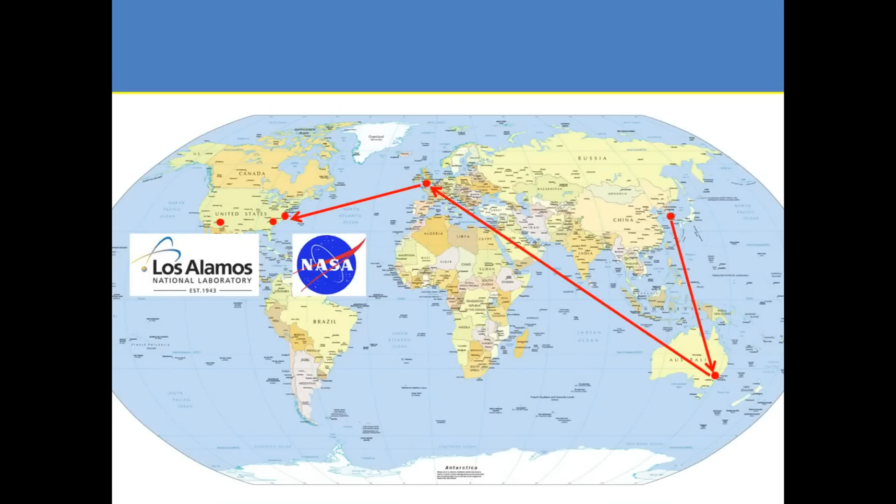I started doing some work on structural optimization. I'm here now, but I spent last year at some of these places in the States, and I'm going to talk a little bit about the things I've been doing over there.

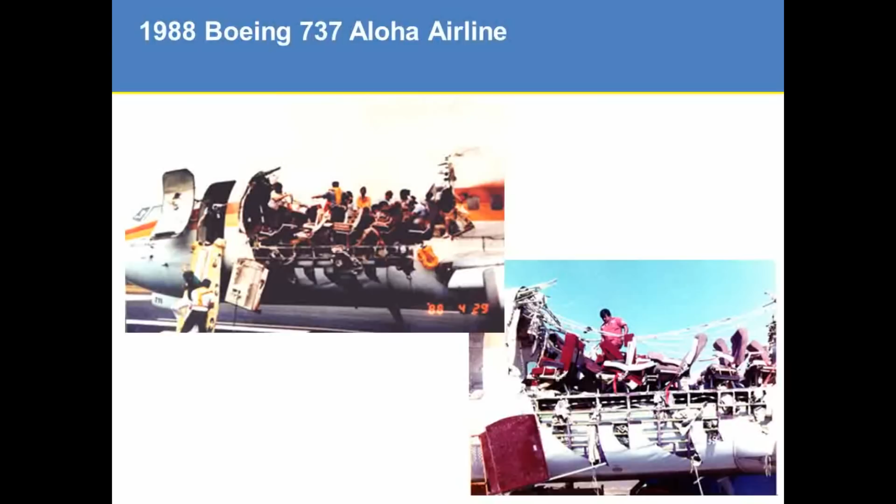So what do I actually do? Well, if I get what I do wrong, this is what happens. So this aircraft that you get on is safe, but this is the sort of thing that will happen if I don't calculate things well enough, and if I don't design things well enough - it'll actually break apart in the air, and you don't like that.

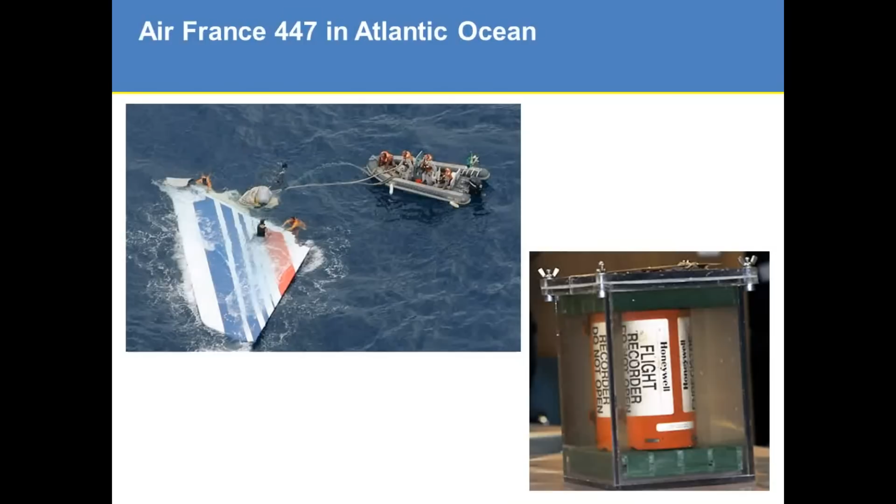So the common question then is why is black carbon fiber material used to make up all of the aircraft? Why is that? Because it's light - yes, excellent, so it's light, and we've got limited power. So aircraft engineering is all about balancing the weight against the power. If we can reduce the weight, obviously fuel economy goes up. This is now a very critical stage in this era to get this right.

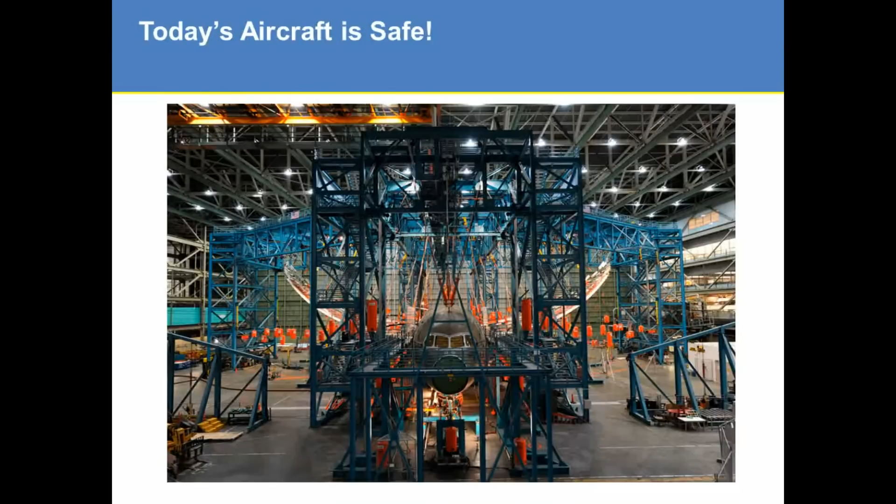Before I move on, I just want to show you the sort of testing that today's aircraft goes through - you can see the wing bend as far as that. The aircraft we fly today or tomorrow is safe.

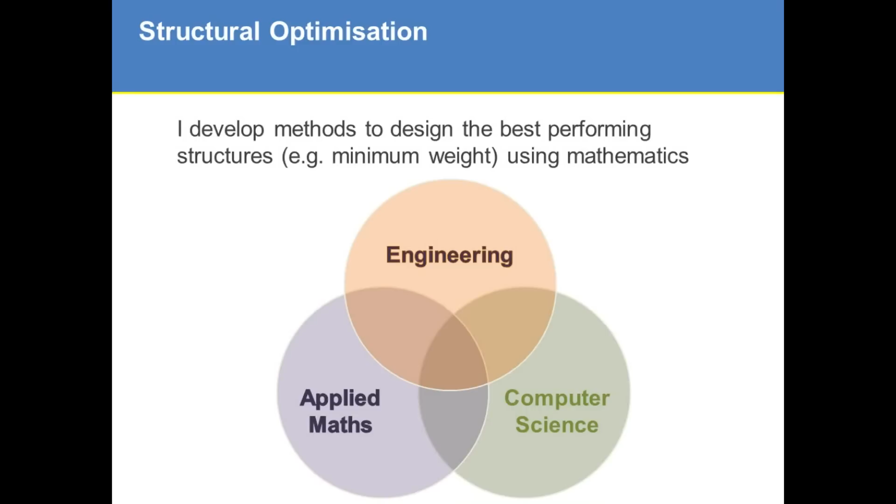So I do structural optimization - I mentioned the word earlier, so it's not so scary now. I develop methods to design the best performing structures using these three different disciplines. I work very much at the interface, and when I use that sort of method, you can see the structure that is actually being optimized.

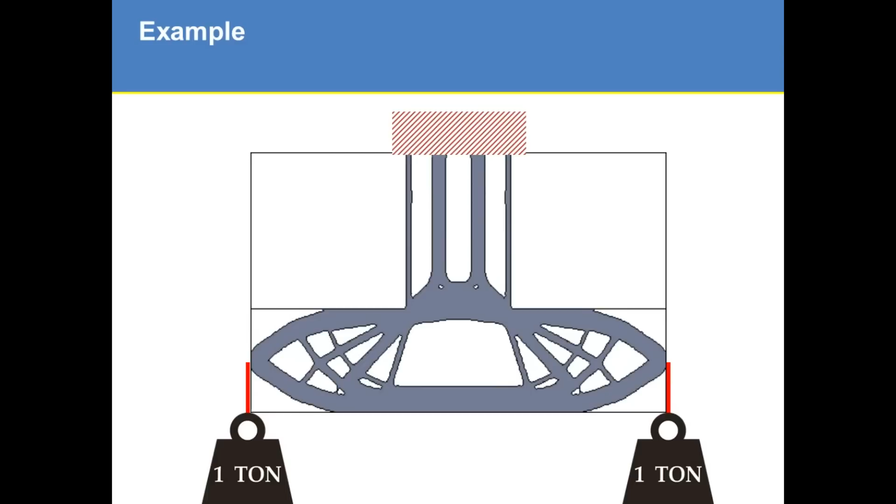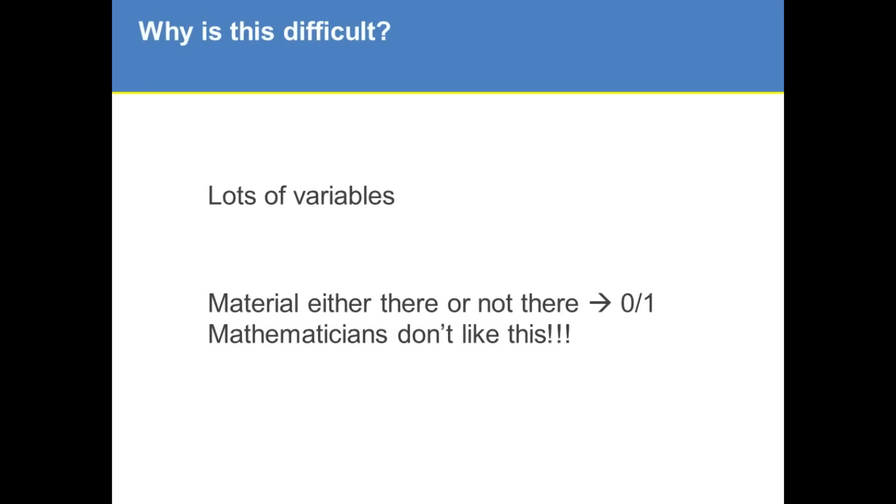My computer algorithm is actually optimizing these structures where I'm hanging the weights over here and just clamping it on the top, so you can see I'm using my mathematics to do these calculations. The reason why this is difficult is there are lots of variables, and materials are either there or not there - this is a 0-1 problem, and mathematicians don't like this sort of problem.

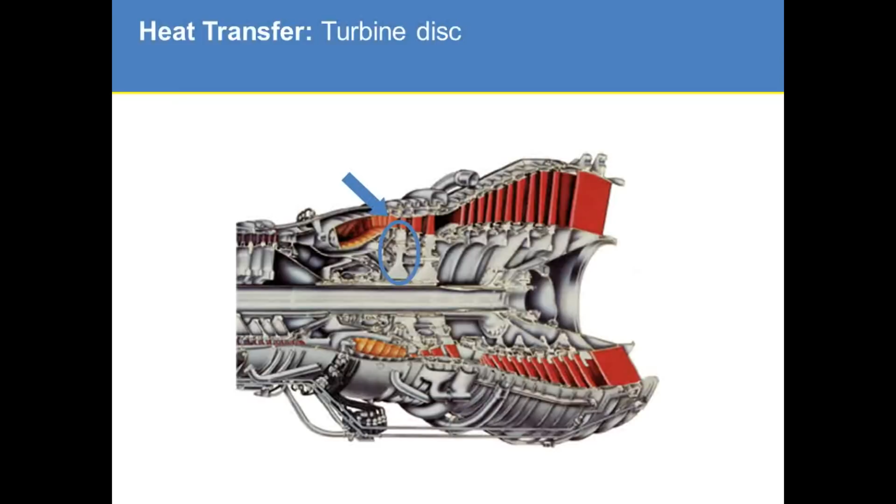So when I actually develop these sort of methods, I apply them to some practical applications, which is what I'm going to show you. This is a turbine disc - this particular element here is what I'm interested in. Apparently it looks like aliens, but this is actually what a turbine disc looks like.

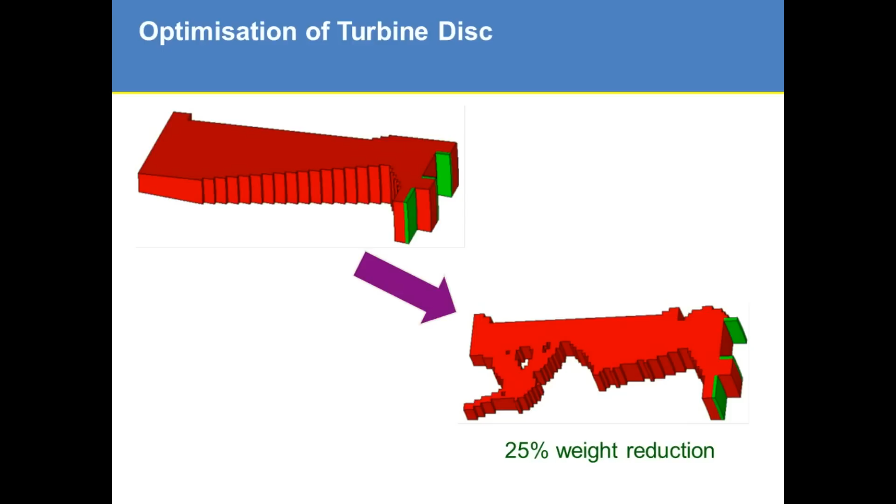Look at this design, which is what we have now - when we apply our topology structural optimization method I mentioned earlier, at 25% weight reduction it looks slightly different, and you can see where the weight has come out. I also apply that to aircraft wings.

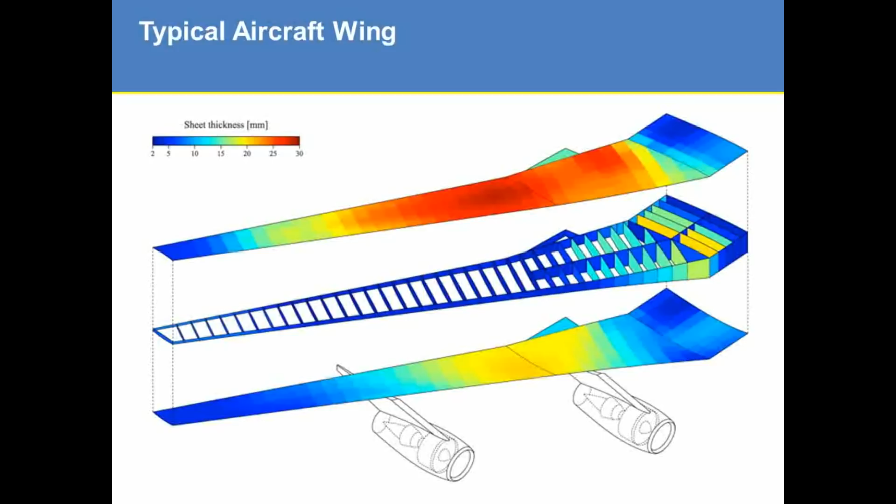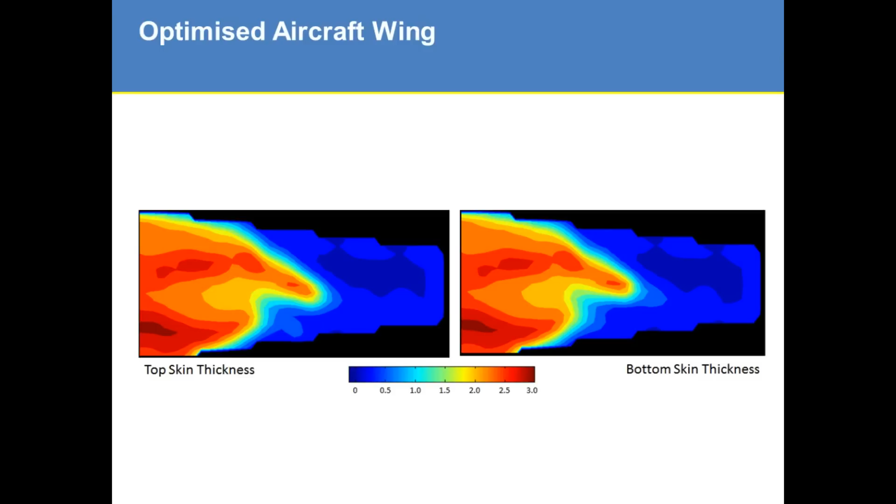This is a typical aircraft wing that you fly in. If you look inside, you can see the top and bottom skin, and inside is this sort of orthogonal arrangement of components going at 90 degrees. When we actually optimize using the methods I've been developing, the thickness in the top and bottom skins varies in weird shapes, getting thinner as you go towards the tip. What's really quite interesting is looking at the wing from the top - very different from the design that we have now.

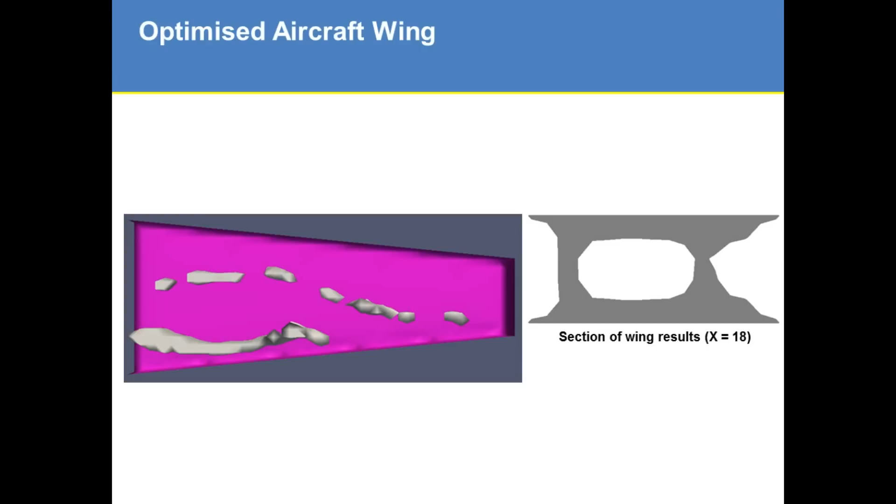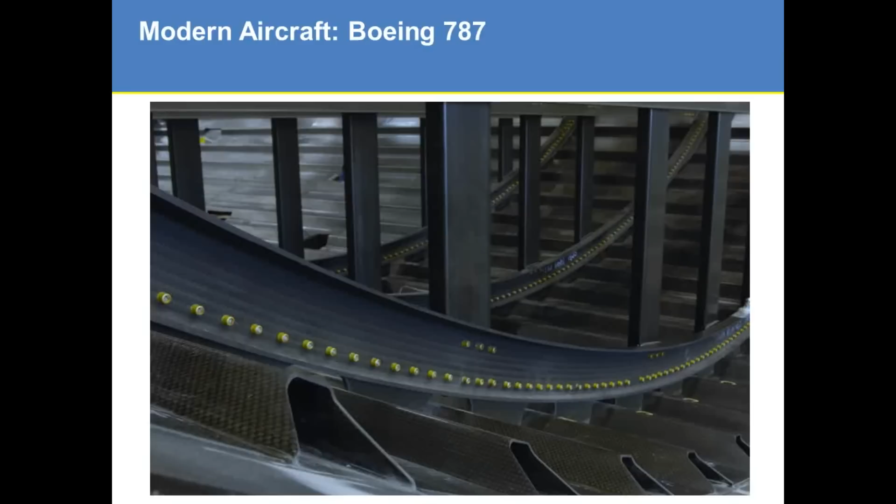So we have these sort of column-like structures. Looking at it cross-sectionally, you see that this design is very different from the current design. If we actually look at the inside of the Boeing 787, when it's not on fire, this is what it looks like - you can see that there's actually not much aluminium, it's very much carbon fiber.

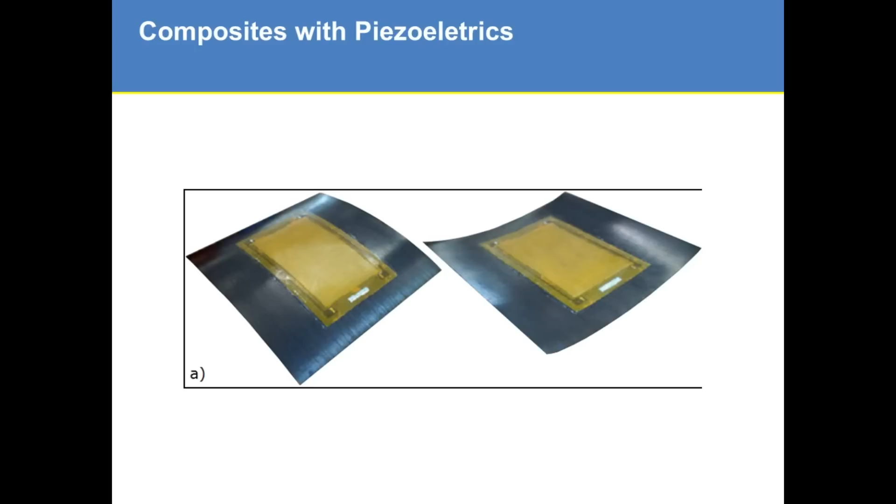You may have come across these things, and I'm going to introduce some of the work that I've been doing using composites. In particular, I want to introduce you to something slightly different - we've got these piezoelectric patches which convert mechanical energy to electrical energy, and we put that over the top of these composites.

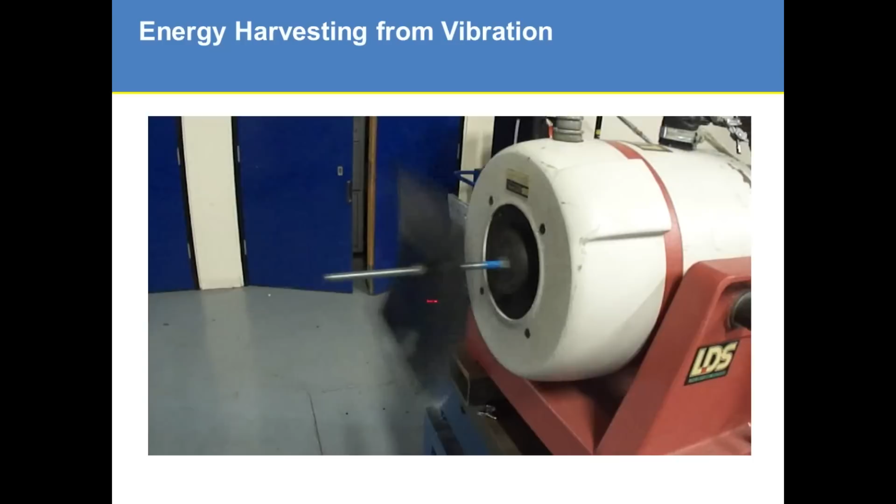And then you can see that it's flapping back and forth quite madly, and as it's flapping back and forth madly, the piezoelectric patch over the top of it is collecting that vibration and turning it into electricity.

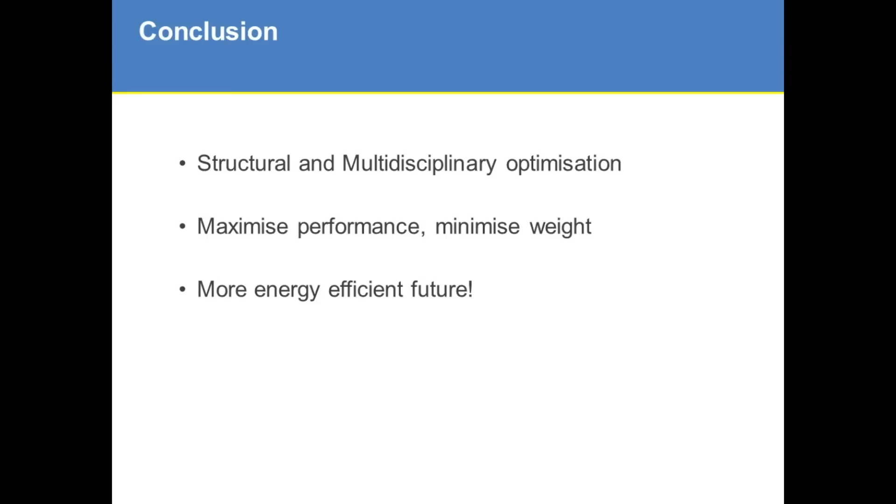So I tell my students at the end of the talk, I must give a summary of what I talked about. So here it is. Thank you very much, and cheers.